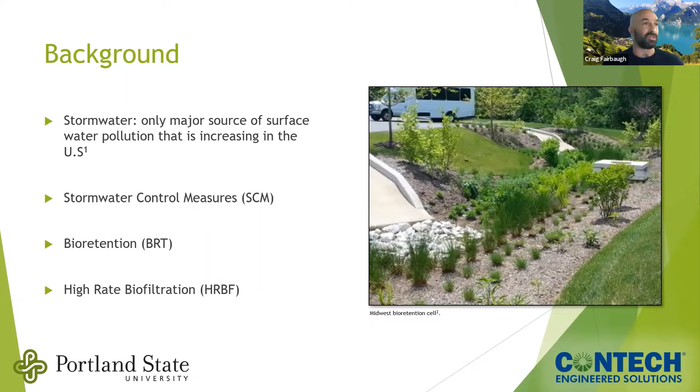And here in the States, and I think similarly in Australia, often when we're designing these systems, we have numeric reduction targets. The most common one is 80% total suspended solids removal. And to verify these systems work, whether it's a manufactured system that Ocean Protect or Contech manufactures, or a public domain system, we need some sort of performance verification and assurance that these are going to meet our water quality goals and protect receiving waters. And here in the States, manufactured devices really have to go through some serious testing protocols.

We have a field monitoring protocol out of Washington State, and we have a laboratory protocol out of New Jersey. And these are some really robust testing protocols. The Washington State Ecology Field Protocol can cost over $200,000 and take up to 2 to 5 years. So seriously rigorous testing protocols, as there should be, to protect our receiving waters and make sure these systems are hitting those benchmarks.

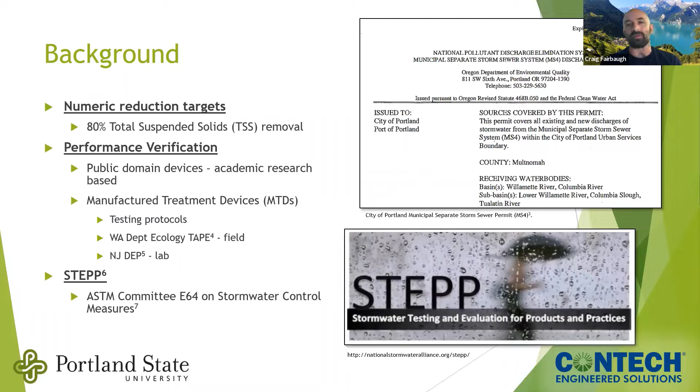And just wanted to note here that public domain devices, these systems are tested a lot differently. They're usually researched by academia. Sometimes some local jurisdictions will do some monitoring, but there's definitely a gap, at least here in the States, on how public domain systems are verified versus how manufactured devices are verified. And that was a secondary goal that I wanted to look at in my research: when I was evaluating that public domain bioretention system, I used a manufactured treatment device rigorous testing protocol in the lab to see how well that would do.

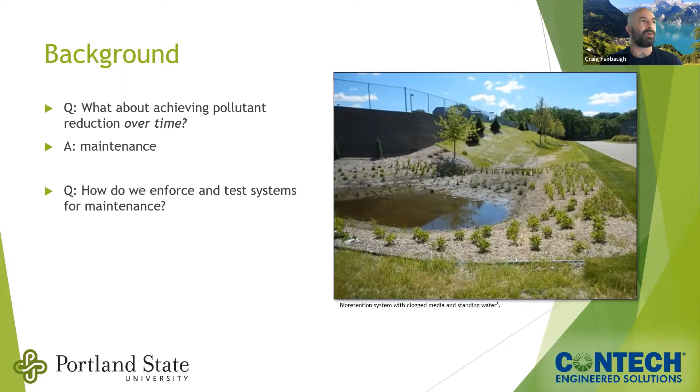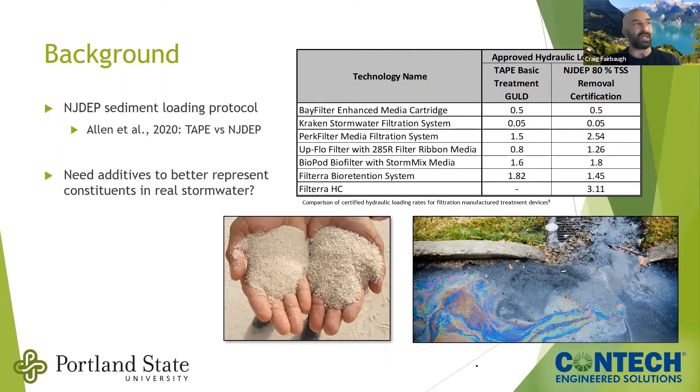And so that's what I wanted to test, to show that when we're testing these systems in the lab and we want to understand how well and how long they perform, we need to be using some additives to better represent actual stormwater. So the objective of my research was to determine the effects that synthetic stormwater made from silica, organics, and motor oil have on stormwater control measure mass load capacity versus just silica sediment alone.

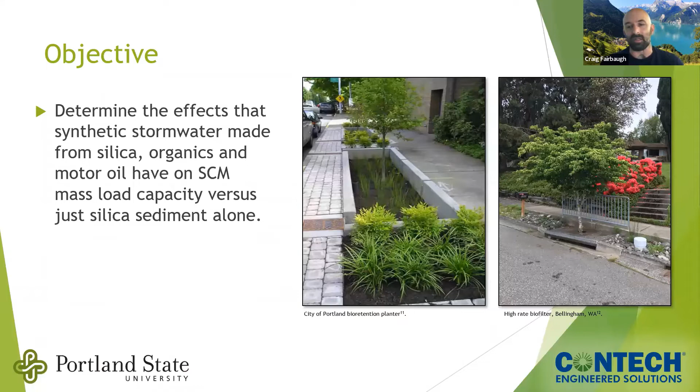I used a big 275-gallon source water tank to kind of mix it together in the right concentration. I delivered it all through a flow meter that measured flow every 15 seconds. And then the high rate biofiltration media was stored in this 55-gallon drum here.

And I tried to use some larger columns here because laboratory testing, a lot of the bench scale stuff with smaller columns, I don't think it really does a great job representing performance of these systems, and especially clogging. And so I wanted to have something as close to full-scale systems as possible to really represent that full surface area and clogging mechanisms that we might see in the field.

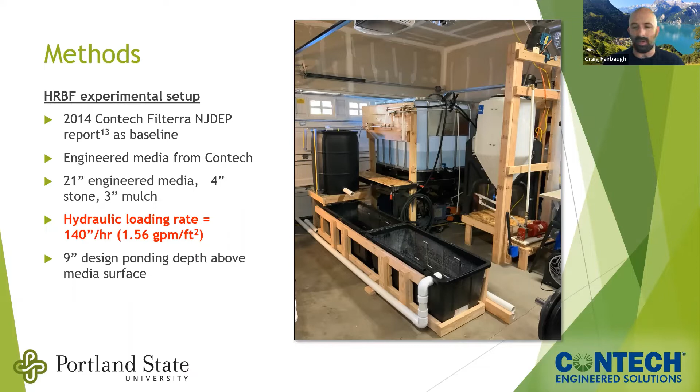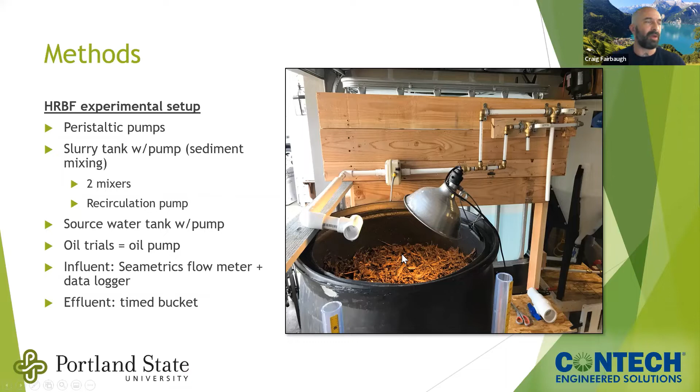And so for this high rate biofiltration column, I ran it similar to the Filterra system. I ran it at 140 inches per hour, so a really high rate. I used 4 inches of underdrain stone, 21 inches of engineered media, and 3 inches of mulch. There's just another little shot there of the slurry tank and the source water tank kind of coming together in a manifold. And you can see the top of the high rate biofiltration system there. That's the top 3 inches of mulch.

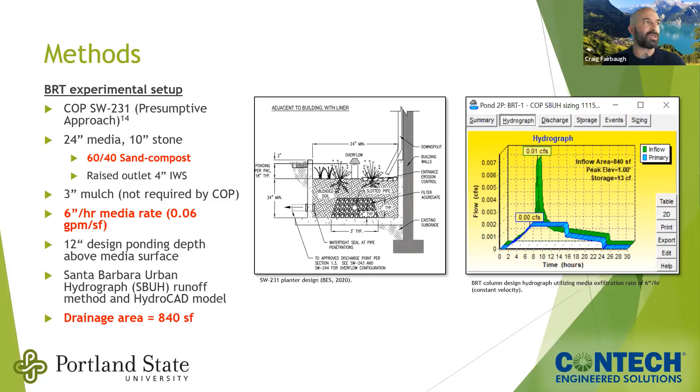And for the conventional rain garden and bioretention system, again, I used the City of Portland, Oregon, out here on the West Coast of the United States. I used their local bioretention mix just because it was really readily available and local and easy to source. But also they use a 60% sand, 40% compost blend for their media. And this is a really common blend that we see in the United States, and so it's gonna be representative of a lot of places in the United States. And the Portland conventional bioretention spec was at 6 inches per hour, so much lower flow rate.

And here's a shot of setting up the conventional bioretention system. Since it flows at 6 inches per hour and it's a lot lower flow, I actually housed the City of Portland bioretention media in this white 275-gallon tank. It needed to be a little bit larger to accommodate that small 6 inches per hour rate.

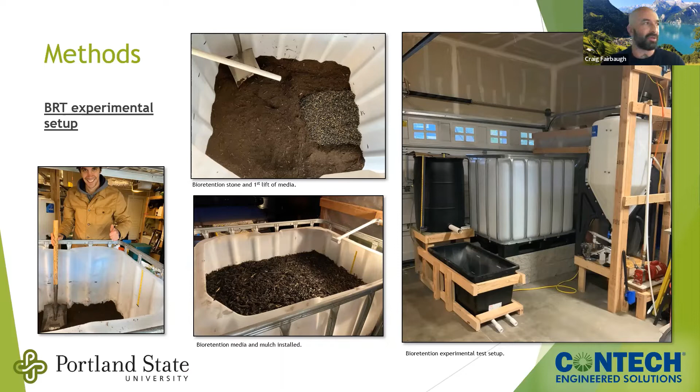And then there on the bottom left, that is a colleague of mine, Michael Gillette. He is a professional engineer, registered in the state of Oregon, and he's familiar with designing these systems in Portland. And so I had him come out and verify that I was installing the system correctly and to Portland spec. And you can see with a thumbs up, I passed. We got this installed to City of Portland spec.

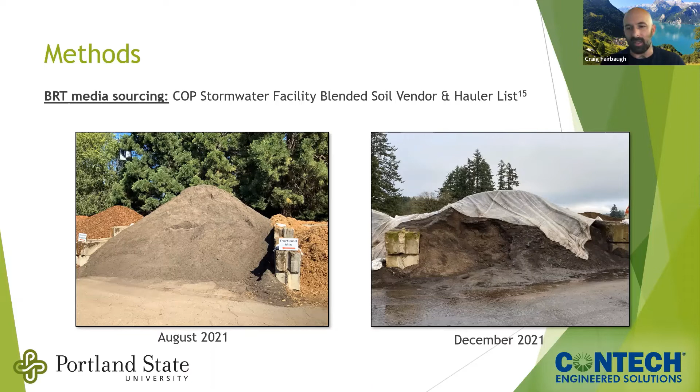A little bit about the protocols that I used to test the system. So the New Jersey filter protocol starts with the removal efficiency trials. You have to run the systems for 10 trials of about a half an hour minimum. You're pulling 5 grab samples, and you have to hit 80% TSS removal efficiency for all 10 of those trials. And that's how you pass their filtration protocol.

But then, as I mentioned, I'm really focused on how long these systems last and when they need maintenance. And the New Jersey protocol has a sediment loading trial. So after you finish those removal efficiency trials, you move on to sediment loading trials. You double up the concentration to try and artificially age it, and you run the system until it clogs and fails. And New Jersey defines failure and when the system needs maintenance in their protocol.

There's 3 different metrics. The first one is when it starts to drop below 80% TSS removal efficiency cumulatively throughout the whole trial. The second failure mode is when the system has too much head loss, so when it goes into bypass and it starts to bypass pollutants and runoff. And then the third failure mechanism where you have to stop testing is when the effluent flow rate starts to drop. So if the system starts to clog and can't process 90% of the treatment flow rate, that's when New Jersey says, hey, stop the test, you're done. That is the mass load capacity of the system.

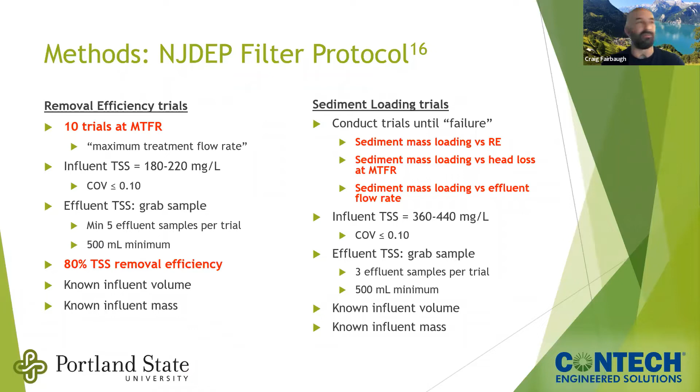And really important when you're testing these systems, New Jersey, any stormwater control measure, the performance is highly dependent on the particle size distribution of your pollutants and your solids coming into it. And as such, New Jersey has a really tight spec on the particle size distribution. There it is in black with your particle diameter on the x-axis and percent finer by mass on the y-axis.

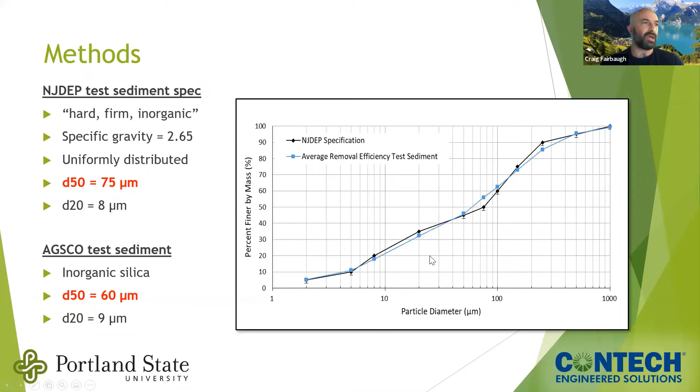And their D50 is about 75 microns. So it has a lot of fine material all the way down to between the 1 and 10 micron range. And my test sediment is in blue there, a little bit finer, D50 of 60 microns. And for the organic trials, when I added that organic stuff that's more representative of stormwater, there's no protocol, there's no real specs for doing this. It's somewhat new.

And so I did a literature review to try and figure out how much organics I should use in my synthetic stormwater, and landed on about 30% organic to inorganic ratio. And I wanted to use something that was replicable and that other people could use if they wanted to rerun this test, and that was very simple. So I just used some off-the-shelf compost from a local home improvement store that had specs already built into it from the U.S. Composting Council.

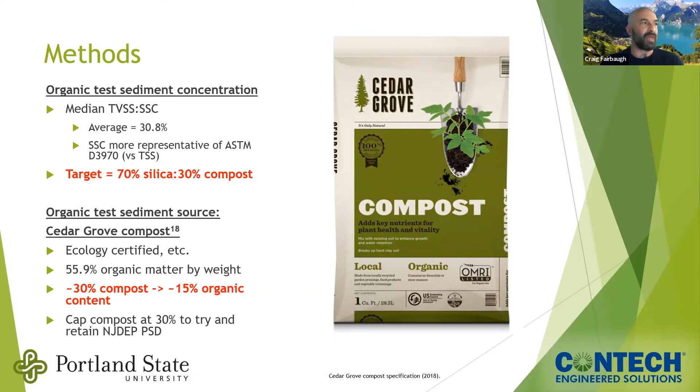But something important to note, I didn't realize that the compost is actually only about half organic matter by weight. And so my synthetic stormwater blend only had about 15% organics in it and 85% inorganic. And again, there's no specs for how to process this stuff and run it. So I wet sieved it to get rid of all the large stuff. I let it sit for 24 hours to kind of get rid of all the fine stuff and the clays,

and decanted it, rinsed it in the laboratory, made these kind of stormwater brownies that you see there in the bottom. They did not smell like brownies you wanted to eat. But that's the kind of sludge and stuff that we would see in real stormwater. I threw it in the oven for about 1 to 2 days at 100 degrees Celsius, baked off all the water, and was ready to go.

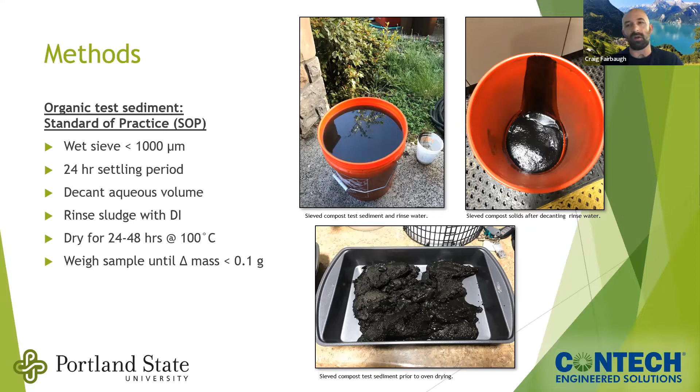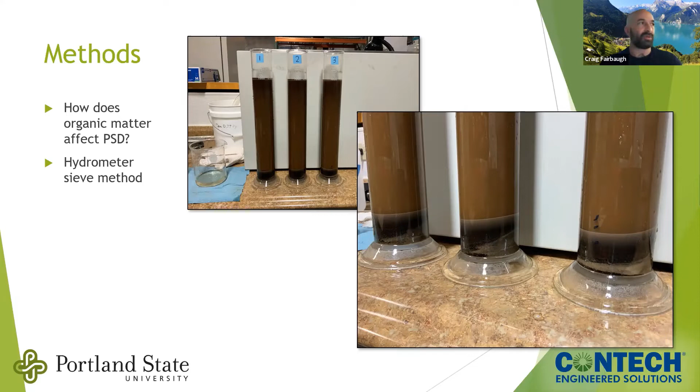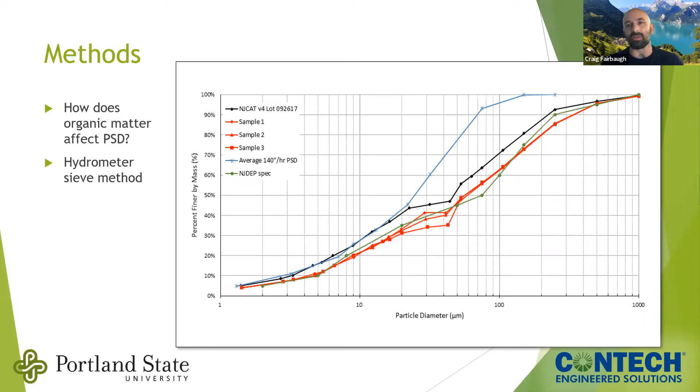And then when I added the organics to it, that 15% organic matter, those are the results there, 3 samples in red. I was pretty stoked that everything lined up on the higher end here, matched up. Honestly, I think it was somewhat of a miracle that it matched up on the top end and the bottom end here. A little bit of disagreement in the middle. But what happened when I put that organic sediment in there, it made the sediment a little bit coarser than the New Jersey spec, but I think close enough for this analysis.

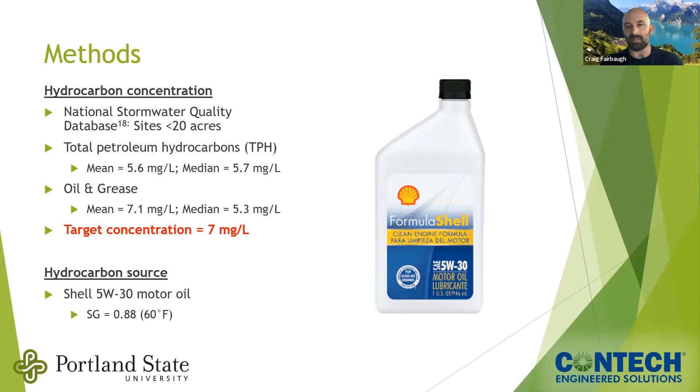And for motor oil, I did a literature review, just trying to find out exactly what kind of concentrations to use for motor oil. I landed on about 7 milligrams per liter, and just used off-the-shelf 5W30 here in the States. That's a common motor oil. And on to results here, the good stuff.

So what you're seeing here is the results for the inorganic clean sand sediment high rate biofiltration column. And on the x-axis, that is net sediment load in pounds per square foot. So pounds of solids per square foot of media in the high rate biofiltration system. And then removal efficiency of TSS there on the left axis. And again, I used an already existing test that was done through New Jersey as kind of my baseline.

It was a 2014 Filterra test, and that's in the orange with the triangles representing the average over time. And then my trials in the Garageatory are in the blue triangles. And so I ran the system for 69 trials, loaded about 63 pounds of that clean inorganic silica into the system, and it failed by 9 inches of ponding and going into bypass. And you can note, I was pretty happy.

The removal efficiency is a little bit different. I was off maybe about 10% from the 2014 Filterra. I think there's a few reasons why this could have happened. Probably because I used a slurry tank for introducing sediment into the system versus an auger. That could be a difference.

But in general, I was pretty happy that I saw a similar trend in decline as I was loading this thing up with mass. It kind of failed and clogged in a similar manner, and almost nearly on the same amount of sediment load. My column actually went a little bit longer, a little bit lower removal efficiency, but lasted a little bit longer.

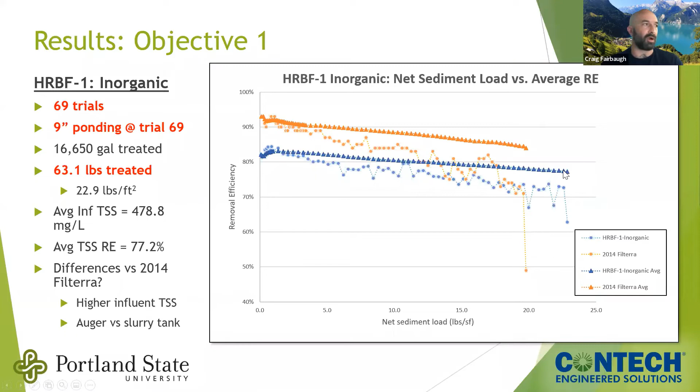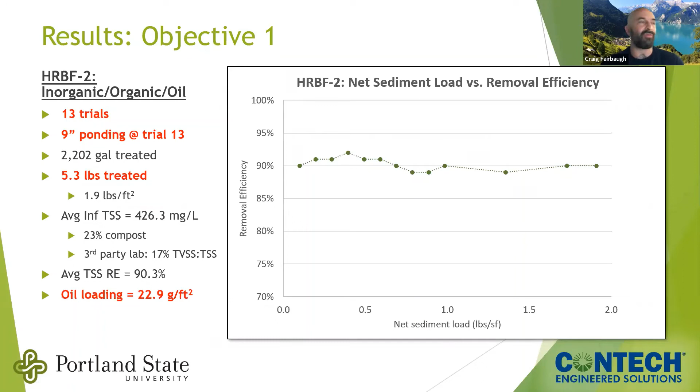And here's what happened when we added organics and motor oil to the test sediment. The high rate biofiltration system only lasted 13 trials. Again, it failed by bypass and 9 inches of ponding, and only processed about 5.3 pounds of sediment. And working for a manufacturer, when I first saw this, I thought it was a little bit troubling.

But when we plot both of these together, you can see here clearly, when you have the inorganic sediment, the system lasted almost forever. And then only 13 trials when you add the oil and organics, and this came out to about 1.9 pounds per square foot. But when I went back to look at our field studies and compare this to some high rate biofilters we have in the field, this was actually spot on with what we see in the field with real stormwater. We see anywhere between about 1 and 2 pounds per square foot of loading when we're using real stormwater.

So it wasn't that my system failed fast in the garageatory, it was that it actually mimicked what happens in the field. And this New Jersey test with the clean inorganic silica just really overestimates how long these systems perform. And so I was pretty happy to see that this lined up with field results, but really clear results here.

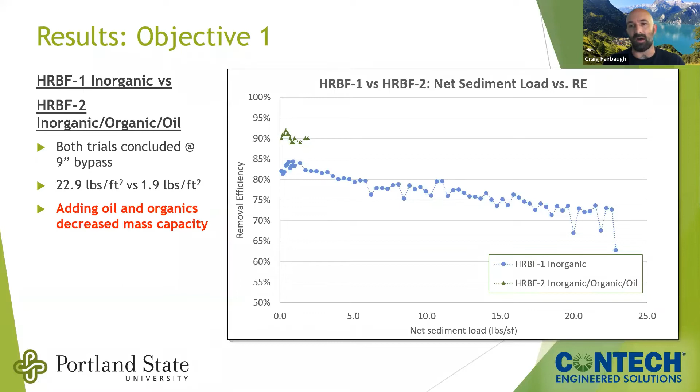If we're looking to understand how long these systems last, and when they need maintenance, we need to be using something in the laboratory that's a little bit more representative of real stormwater and adding some oil and organics in there. There was almost about an order of magnitude difference here in how fast the system will clog when you're using just inorganic silica or adding oil and organics to it.

Moving on to the conventional bioretention system, the public domain City of Portland system. This system, I actually couldn't run it to failure. Again, it's operating at a really low loading rate at 6 inches per hour. And so I ran it for 117 trials. I loaded it with 24 pounds, about 1.8 pounds per square foot. And I think what happens in this case with such a low flowing device, it's really just building up that clean inorganic silica and kind of creating a sand filter on top of the bioretention system.

And so this thing probably would have lasted forever. I'd probably still be in the garageatory to this day if I was trying to run it to failure and just piling sand in there. And so I called it at 117 trials because I wasn't really interested in how long the system would last with clean inorganic silica. I just wanted a data point that I could compare when I loaded it with motor oil and organics. And so ran it for 117 trials.

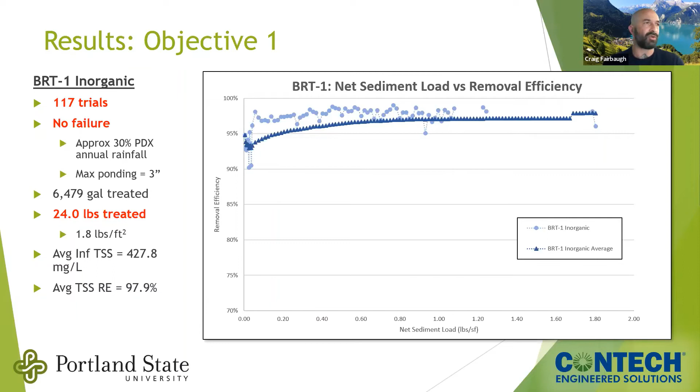Surprise, surprise, when I loaded it with organics and oil, in addition to the clean silica sediment, it only lasted 31 trials. And the bioretention, the public domain system, it didn't fail by bypass and ponding. It actually failed by dropping below 90% of the treatment flow rate. So that graph you're seeing there, it's again net sediment load in pounds per square foot on the x-axis, and that's flow rate in GPM on the y-axis, and the red line, that's that 90% treatment flow rate threshold. I believe the design flow rate for this one was 0.83 GPM.

So you can see it kind of struggled a little bit in the beginning, and then towards the end, it started to drop below 90% of the treatment flow rate, and that's when New Jersey would call it quits on this system. So it loaded about 5 pounds into the system.

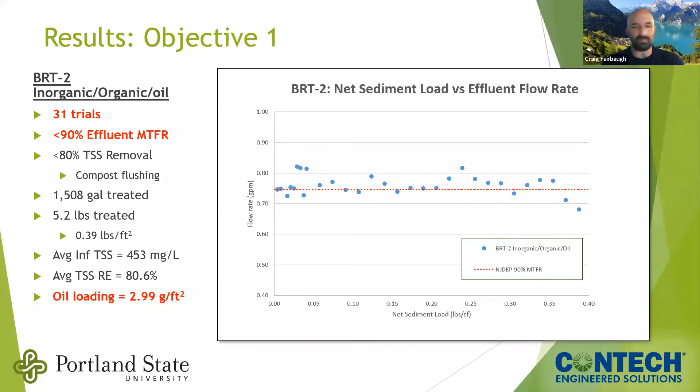And if this was going through the New Jersey test, through the manufacturer treatment device protocol, New Jersey would have said, see ya, you did not pass the test. Although notably, it did start to leach less and less media, and it did eventually recover and start to get up to 80% TSS removal.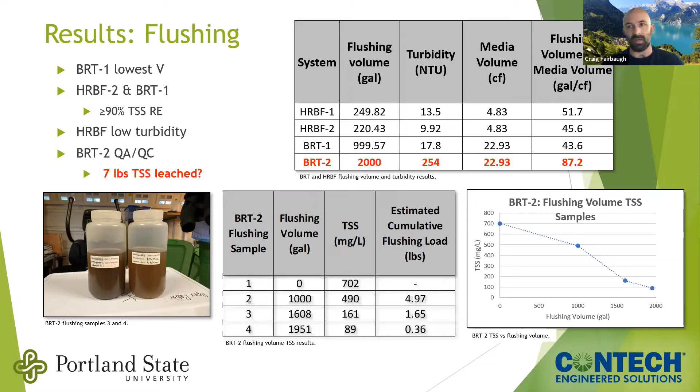We know this is a problem here in the United States. We're trying to get jurisdictions to change their specs. Some are on the forefront and changing with some more robust specs, but to get a really good engineered media, it takes a lot of QA/QC, a lot of testing. It really is an engineered media. It's not just a simple spec that someone can throw together.

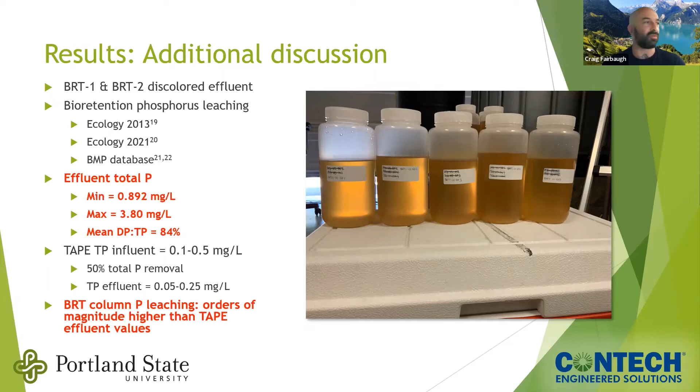And so I'll stay on the soapbox for just another minute here. Why this happens in the United States, there's really a focus on healthy plants meaning that you're getting good water quality. And as you can see in this picture, it might be great for the plants, but it is not great for effluent quality. And I rib a little bit that here in the States, it's the Clean Water Act. This isn't the Landscaping Act. This isn't the Pollinator Habitat Act. We're looking for clean effluent water here. And so, really, we need to have an engineered media that's all about your media if you want to hit your water quality goals.

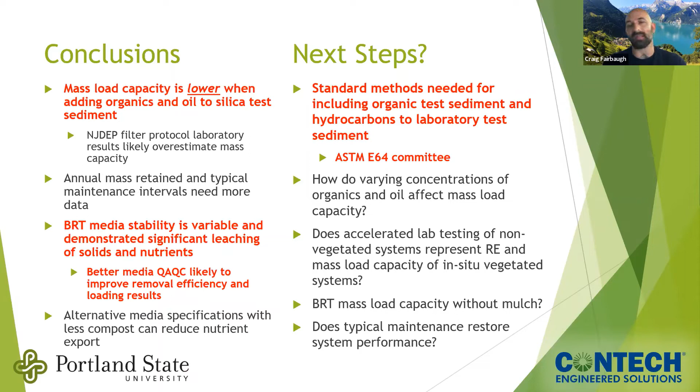And some quick next steps out here in the States. I'm hoping to get involved with ASTM and get some standard methods for using oil and organics in your test sediments, so that we can have some protocols to be able to test the performance of these systems, and most importantly, the long-term performance and maintenance and mass capacity, so that hopefully when we're designing the systems in the future, we could test them and make sure that they're lasting a long time and protecting our receiving waters.